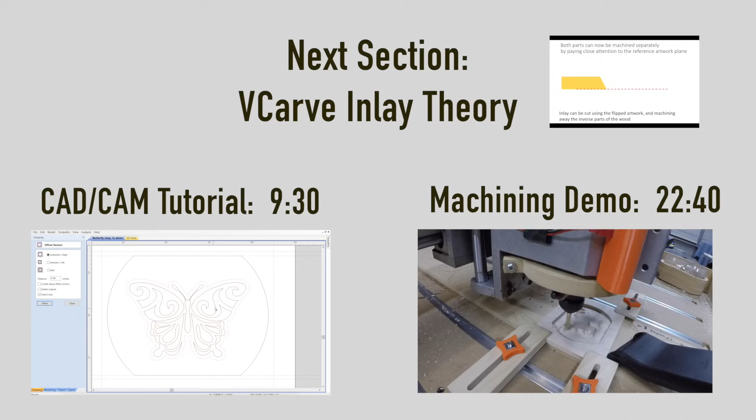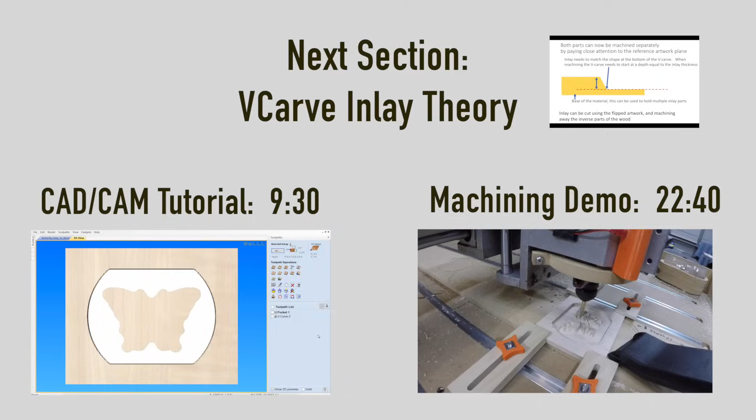If you would like to skip the next section explaining the background on how V-Carve inlays work, jump to the 9 minutes 30 seconds mark in the video to get to the CAD CAM tutorial. If you want to skip all the way to the machining section, jump to the 22 minutes 40 seconds mark.

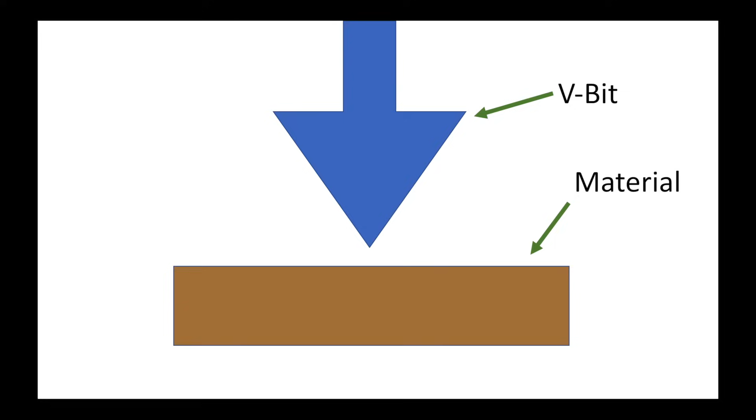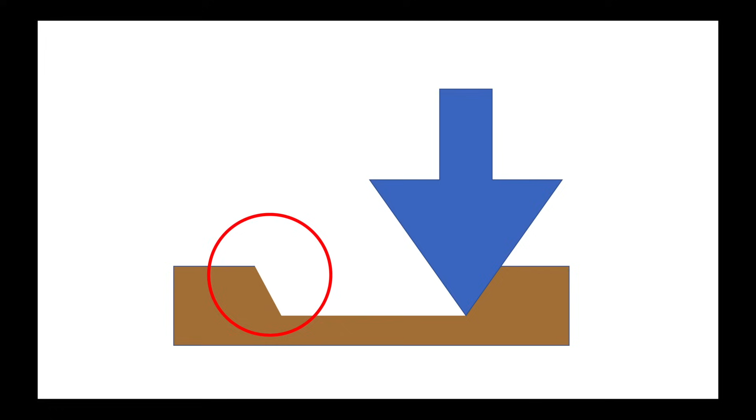First, I'm going to go through some theory of V-Carve inlays and the basics of how to machine them. So in this diagram, the blue arrow represents the V-bit and the brown rectangle represents the material we're going to cut in. And this is generally how a V-bit cuts. And it leaves a channel with angled edges. So we're going to look at one of those edges a little more closely.

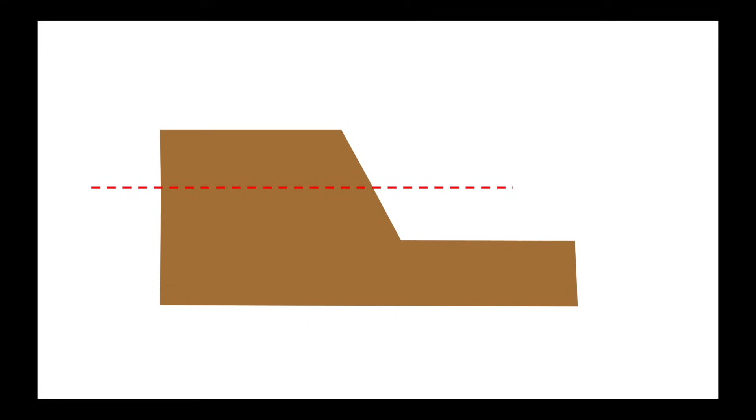And if we split this horizontally down the middle, so we split the depth of the channel, so here's a line representing that, and then we take the material that's above the line, so we color that yellow, and we rotate that around. You notice that it's a perfect fit into that channel. So this observation is the key to designing V-carved inlays.

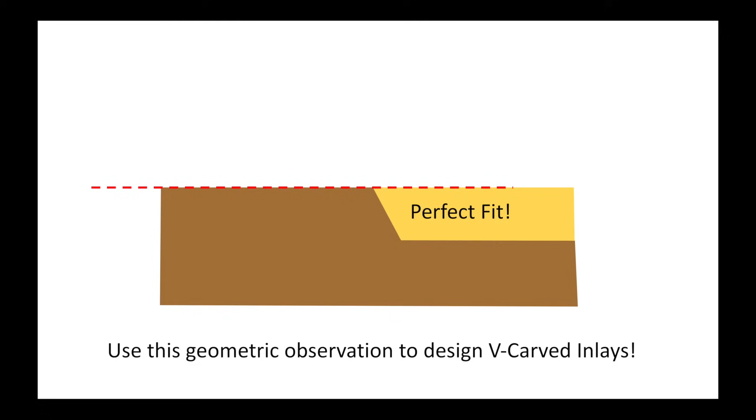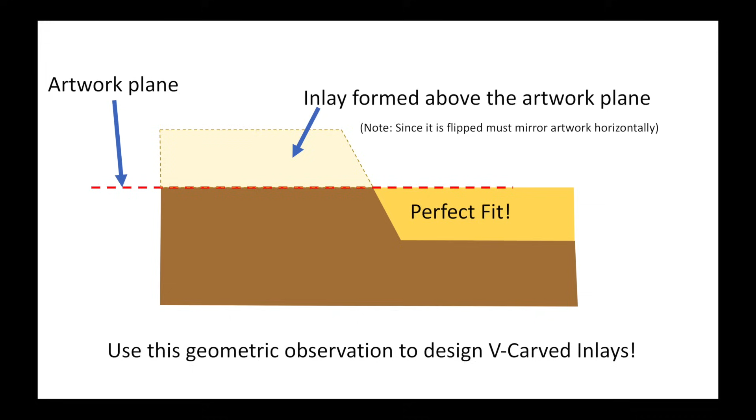Alright, so we're going to define a few terms to help us machine these. First is that line that we created is really called the artwork plane. And so this is the plane where you'd create your designs or any shapes that you want to have the inlays look like. So once that artwork plane is defined, we'll notice that the inlay, how it was machined, is really formed above the artwork. And note, since we had to flip it over to fit inside the channel, we've got to remember to mirror the artwork horizontally when we're working on the CAD and CAM. Also, the base pocket is formed below the artwork plane.

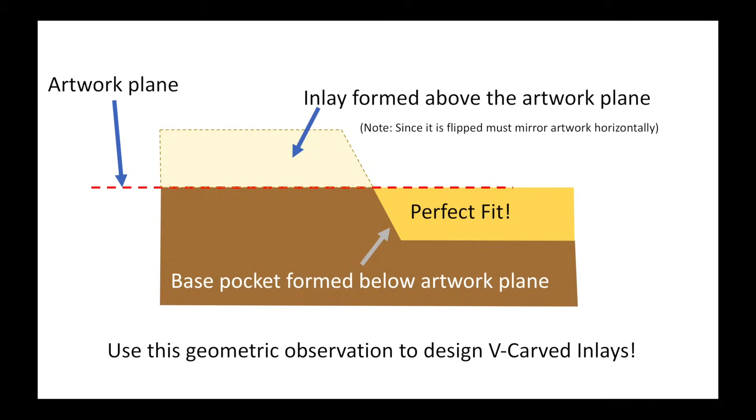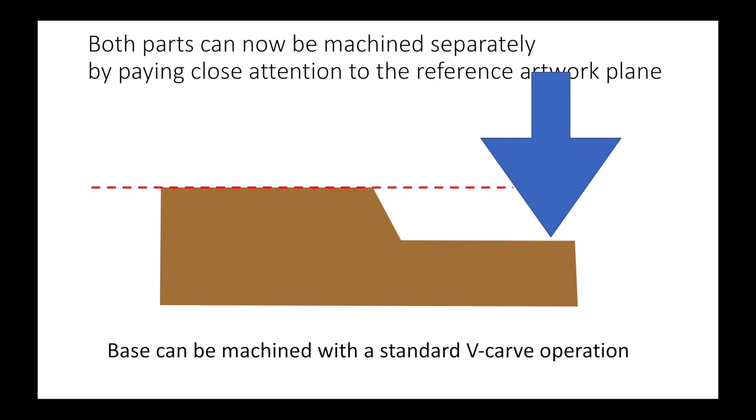So now that we've looked at that, we can see that both parts can be machined separately. And so you just have to pay close attention to that artwork plane when you're setting up the machining process. Okay, so looking at the base, this can be machined with a usual standard V-Carve operation. And looking at the inlay itself, this can be cut by first flipping it over. And so this is why we have to invert the artwork. And now we want to machine kind of the inverse parts of the wood. So we want to leave proud the parts that we're pocketing out of the base.

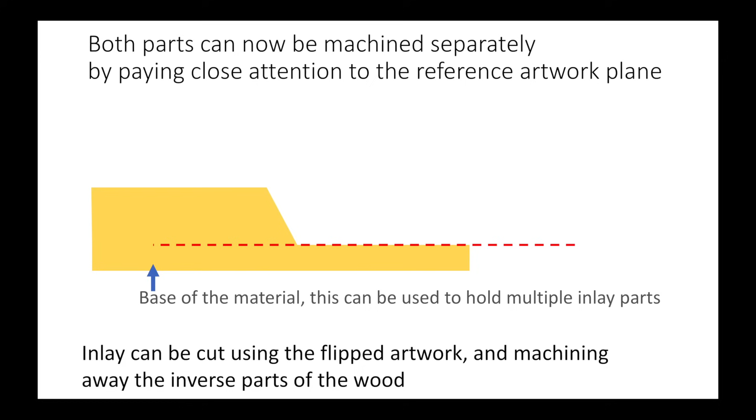So when we're doing this, we also don't want to cut all the way through the material. And so by leaving this kind of base at the bottom of the inlay, this allows us to have multiple parts to the inlay all attached together, and so we can glue them in all at one time. And another thing to note is that the inlay needs to match the shape of the artwork we have at the bottom of the V-Carve and not at the top. So this means when we're machining the V-Carve, we need to do a start at the depth equal to the inlay thickness.

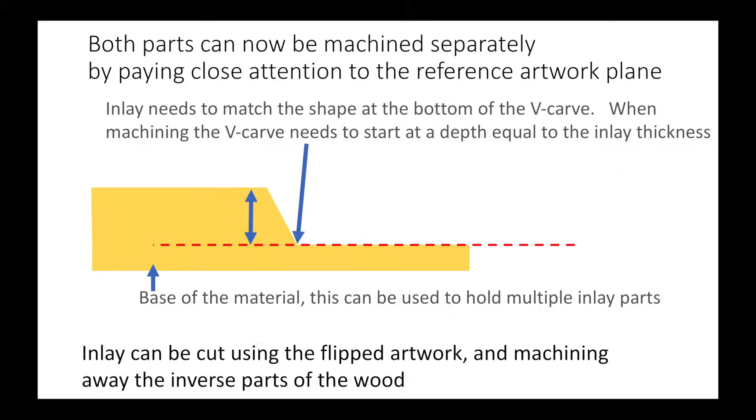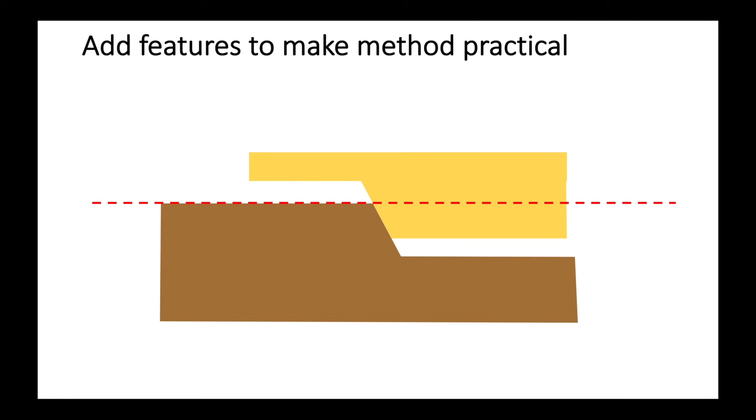So there are also a couple of things we need to do to make this method more practical. Because if we machined it as is, as we've talked about, there could be errors in the depth or the widths of sizes, and then the inlay won't turn out as well. So a few things to add to make it more practical. The first one is usually called the glue gap, and this is at the bottom of the inlay. This also doubles as a gap to allow for depth of machining errors, as well as when you're inserting the inlay, sometimes you don't get it in there at a perfect angle, and so this channel allows you to have slight misalignments, and the inlay still looks great at the end. And to accomplish that extra gap, all we do is add a little depth to the base pocket when we're cutting the inlay.

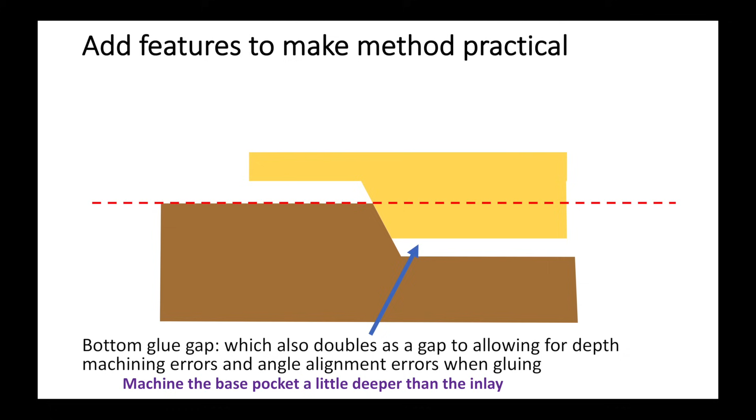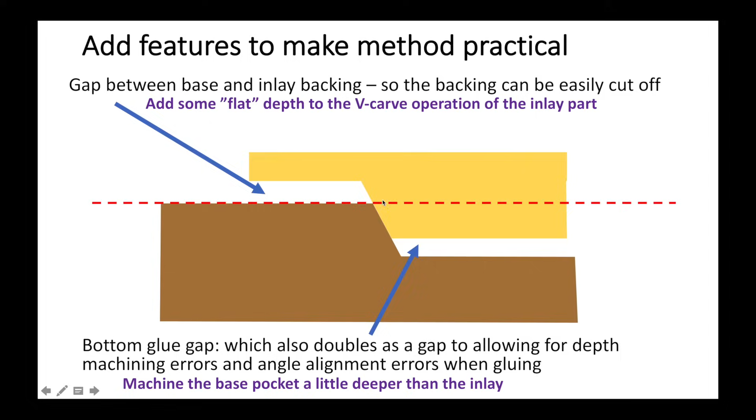And another important thing to add is a gap between the base and the inlay backing. And this is because after the glue is dried for the inlay, I usually take a bandsaw and insert it into this gap, and it allows me to cut off most of the inlay waste material. And this can be done by adding what's called flat depth to the V-Carve operation, essentially just a little extra depth beyond where the artwork plane is. And I'll go through that in a little bit more depth in a bit. Okay, so let's go over some of the basics of how we're going to machine these. So first the base.

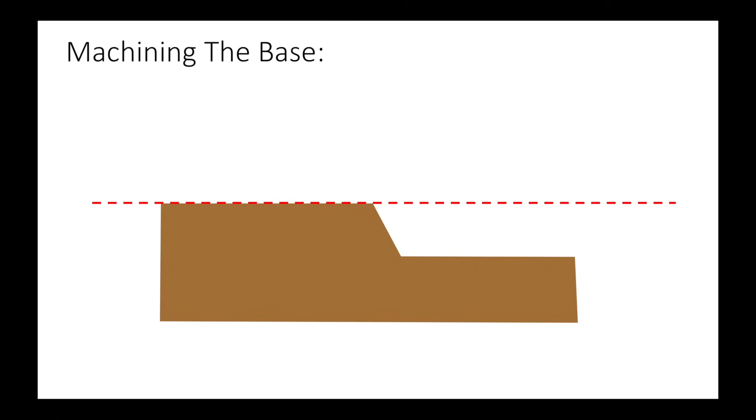So here's the base, and this is what the dialog looks like in either V-Carve or Aspire. The main components are essentially the cutting depths. There's a start depth and a flat depth option. For the base, the start depth is really the depth to which we want the artwork plane to be in the material.

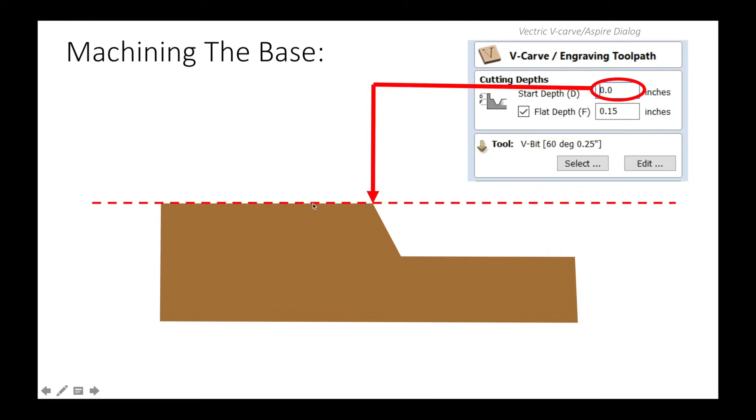And in the base, that's 0, because it's at the top of the surface. The flat depth is the depth we want the V-Carve to cut to, and in this case it's really the inlay depth plus the glue gap. For the example in this video, the inlay depth is 1/10 of an inch, and the glue gap is about 50 thousandths. So the total flat depth is 0.15 inches.

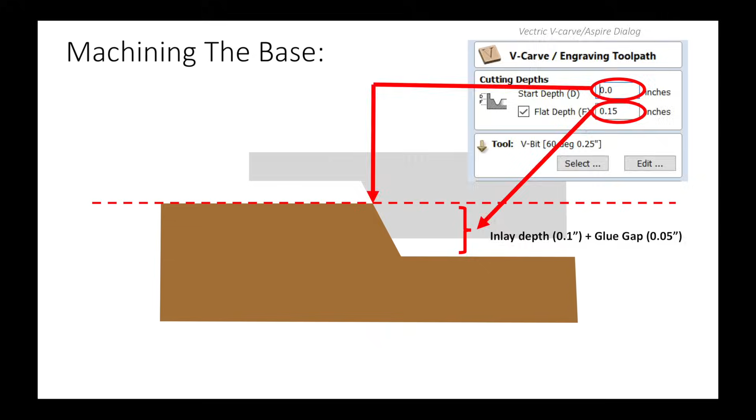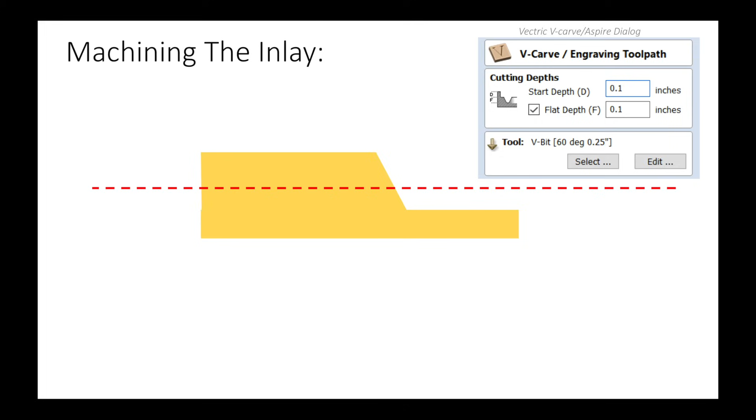Alright, so we'll look at the inlay part now. We're going to machine this flipped over, and we'll bring up the dialogue. This is the dialogue again from V-Carve or Aspire. Again, now we've got to set the start depth and the flat depth, and this is really the key to doing V-Carve inlays. The start depth is the depth at which we want the artwork plane to be located, and that is the inlay depth. For this case, it's 0.1 inches.

And then we want to add a little gap to be able to cut off the backing from the inlay, and that is the flat depth, which in this case is another 0.1 inches. Note that I'm using the exact same tool between the base and the inlay, which is a 60-degree V-Carve bit.

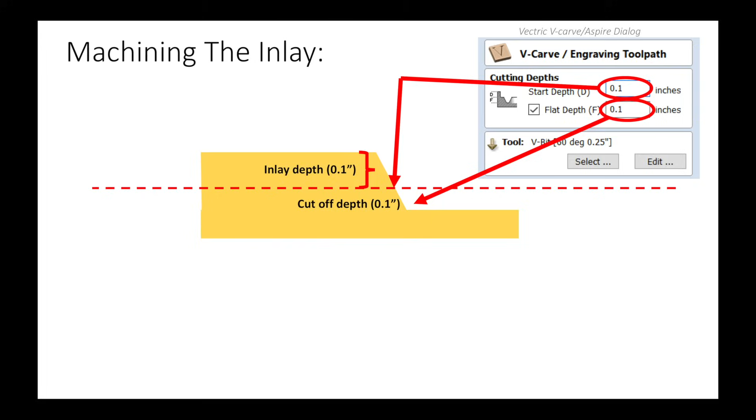One other thing to note, you should be careful that each V-bit can cut to different depths, so you want to make sure your inlay depths and gaps are all within your bit's capability. For example, in the base, there are two components, the start depth and the flat depth, equal to the inlay depth plus the glue gap. Added together, in this case, that's 0.15 inches, so we just have to make sure the V-bit can cut at least 0.15 inches deep.

Similarly for the inlay, we have the inlay depth as the start depth, and the flat depth is the gap for cutting off the waste material, so we add those together and get a total depth of 0.2 inches. In this case I'm using just a 1/4 inch V-bit, and it has a cut depth of a little over 0.2 inches, so it'll work well for this example. But for deeper inlays, you're going to need a larger V-bit.

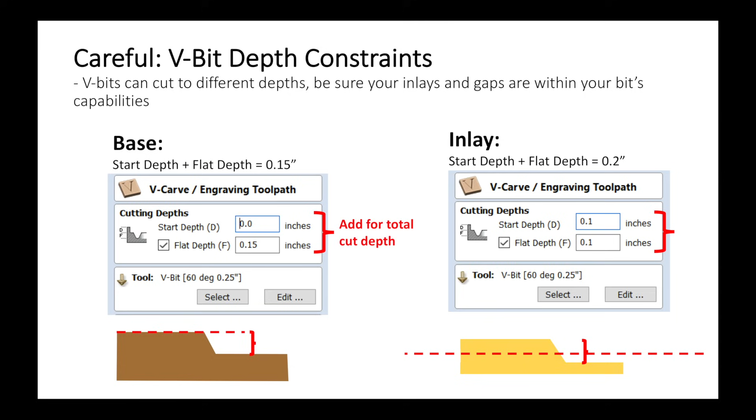So first up, set the width of the material to 5 inches and the height to 4 inches, with a thickness of about 1/4 inch, or whatever your material is. Then I usually put the 0 point in the lower left corner, and then hit OK.

After that, we're going to create the outer profile for the coaster, centered in the material, with a diameter of 3.7 inches. Then I'm going to create a little chamfer around this profile by creating 2 more circles, slightly larger, at 3.74 and then 3.66. If I just do a V-carve between these 2 lines, it'll give a small chamfer around the outside of the coaster.

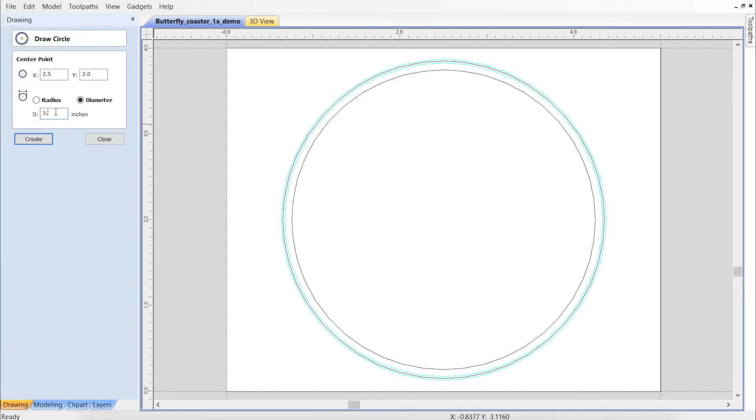Next I'm going to create a decorative groove around the outside by creating another circle at the same center, first at 3.5 inches, and then another at 3.4 inches. I'll select those and move them to a new layer, and call that Deco, for decoration. Maybe change the color so you can see it.

Next I'm going to create a guide for where to place the artwork, or the butterfly. So I'm going to create one more circle for that, with a diameter of 3 inches.

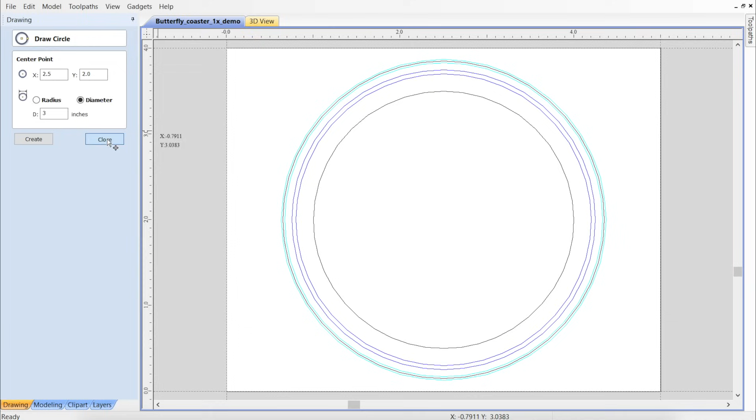All right, so the next step is to import the artwork. I'm going to import it as a vector, and there's the butterfly.

You'll notice that while it is centered in the workpiece, it doesn't look quite centered because of the larger wings at the top. So I'm just going to shift that down a little bit by selecting it all and using the arrow keys to visually center it more in the coaster. Looks about right, touching the guide circle there.

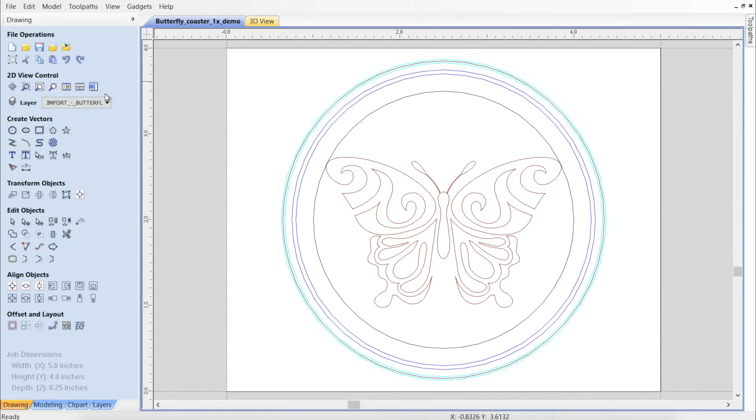All right, so now this is the design of the coaster itself, and we're going to generate the toolpaths for it. We're going to make 2 different toolpaths: some V-carving for the chamfer, the groove, and the design itself, and then we're going to cut out the profile. So the first thing is the V-carve, so we're going to select the vectors for that, selecting each one by holding down Shift.

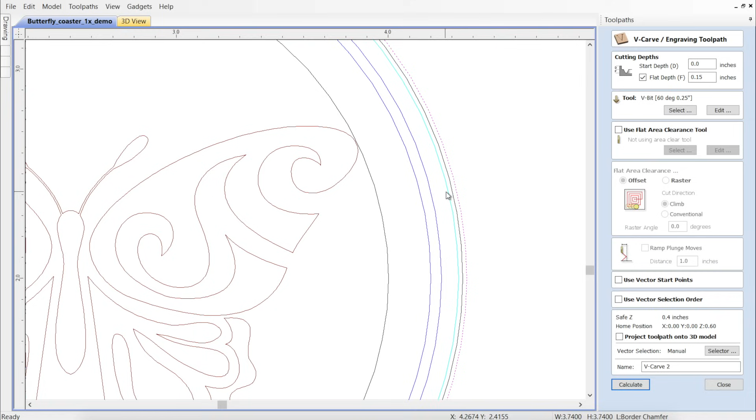The important things here are to make sure the start depth is 0, and then your flat depth, set it to the thickness that you want the inlay to be, plus a little extra space for the glue. So in this case, the inlay thickness is going to be 0.1 and the glue space is going to be 0.05. So those add up to 0.15 inches.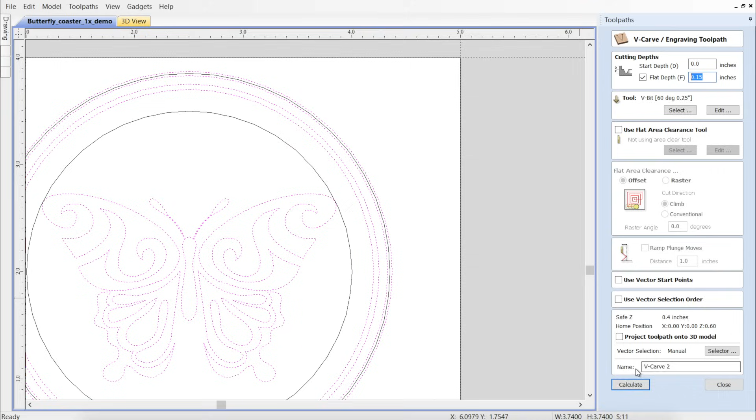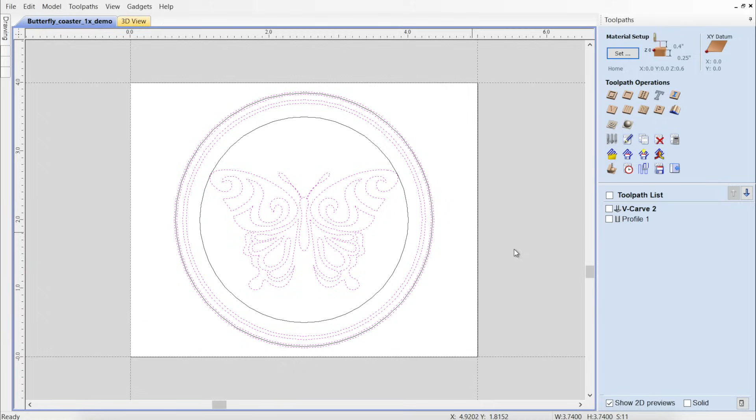All right, then calculate that. And then we can preview that toolpath. All right, that looks pretty good. So we'll close that down. And next, we're going to look at the profile. So we're going to set up the profile.

For this one, we're going to do a start depth of 0. A cut depth, we're going to go all the way through the material, plus about 25 thousandths, just to make sure we get all the way through. And then I have selected an 1/8 inch end mill here. And this is going to take 5 passes. I'm usually pretty conservative on how many passes I use. And then we'll also add some tabs.

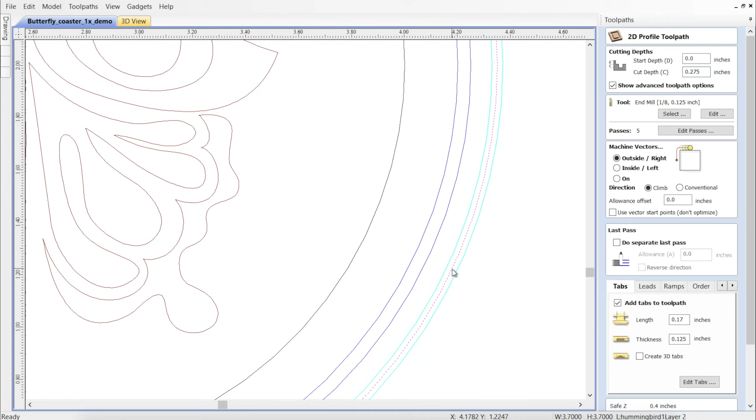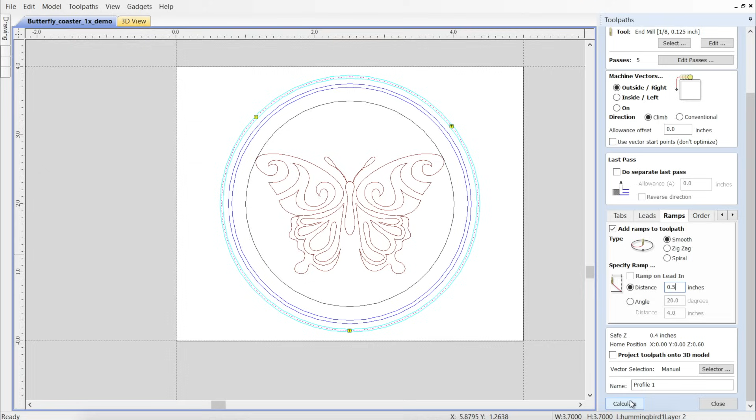So first we've got to select the profile. I'm going to edit the tabs. So I usually put in about 3 tabs on a coaster. And I usually add a ramp of about a 1/2 inch. And hit calculate. And it just gives you a warning that it's going to cut all the way through, so we hit OK.

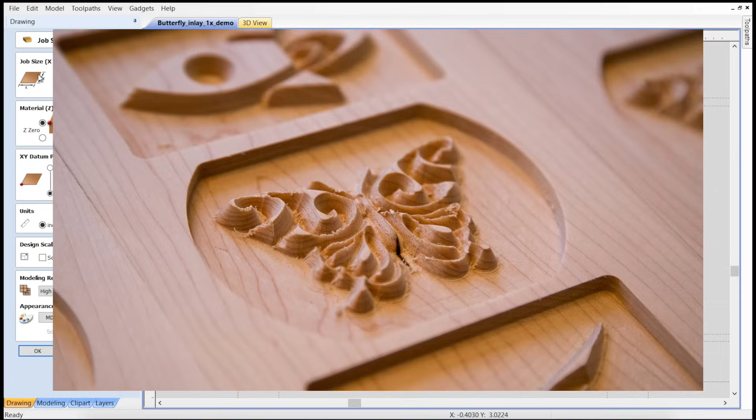Now we can preview that toolpath. And that looks pretty good. So the base of the coaster is ready to go. Okay, now we're going to make the inlay part that goes into the coaster. We're going to make this out of maple. And the width of the material is going to be 5 inches, height of 4, and a thickness of 1/4 inch.

First thing is to bring in the artwork. Once the butterfly's in, because we're going to insert this, flip it over, when we insert it into the coaster, we have to mirror it horizontally. So this is almost already symmetrical, but I'm going to click the flip horizontal button. It does flip it.

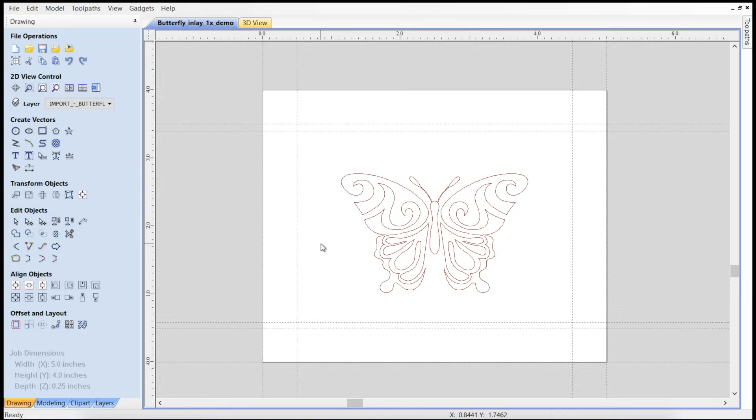Alright, now I'm going to create the zone around the butterfly that I want to clear out. And I pick a fairly big one because I use a bandsaw to cut this inlay part out before I insert it into the coaster. So the region is going to be about 3 3/4 inches in diameter.

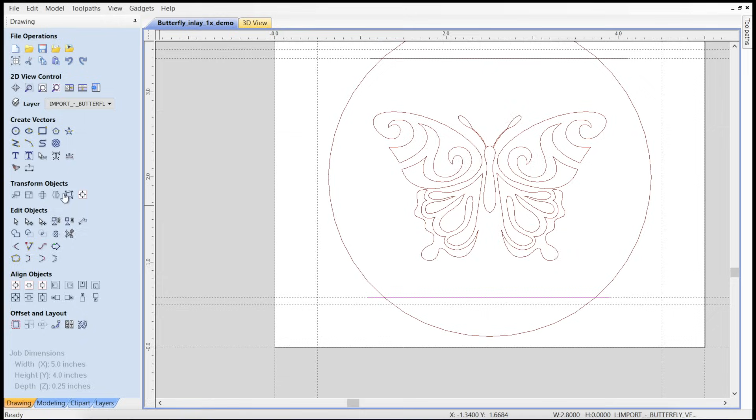That's a bit big, so what I'm going to do is cut down the top and the bottom parts of the circle. Just a little bit. And I'm just going to quickly trim off those extra regions. Okay.

Now, you can just V-Carve this if you would like, but I don't like to V-Carve it directly. I like to be able to control how deep each pass goes with the clearing tool, especially if you want to do this with really hard woods. I find that if you go too deep on the clearing cuts, I can break bits or other things. So I make my own kind of regions.

So to do that, I just select the artwork and then I use this little offset tool. And the first offset is 0.08 inches. So this gets it outside of kind of where the V bit will cut. So I offset that. And I just have to delete some of these little extra parts that show up. I'm looking for the outside line. Then I select the outside line and I offset that again by about 1/10 inch.

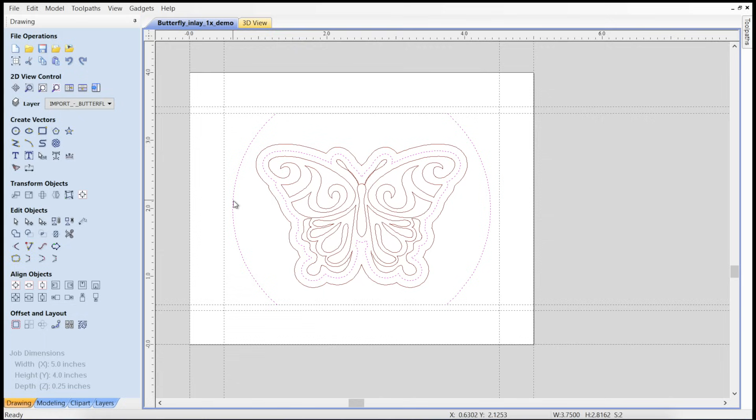Okay, so what this line out here and this line out here represent is what I'm going to use to clear with the larger end mill. So I'm going to move these to a different layer. I just call these the clearing vectors. And then this right here is going to be the outside of where I'm going to V-Carve. So I just move that to the V-Carve boundary, just to make it a little easier to see.

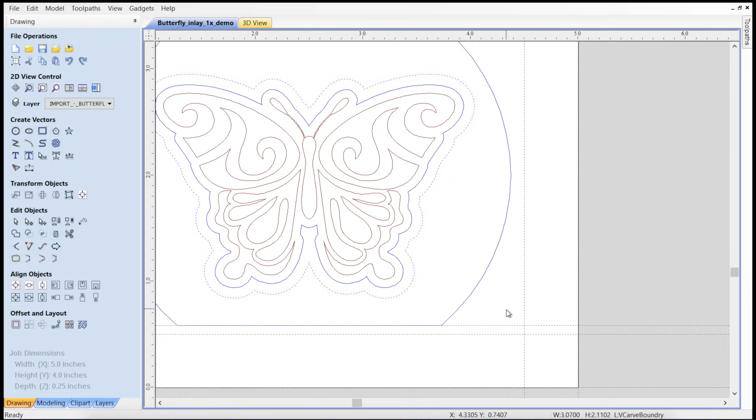Alright, so that's all we need for the CAD, and now it is time to create the toolpaths. So the first thing we've got to do is the clearing pass, and we're going to do that between these two blue lines. So we're going to do that with a pocket. Pocket out between this blue line

and that one. And we're going to go down to a depth of cut, which is 0.2 inches, and this is going to be the total that we also want to do the V-Carve. So this comes from the fact that we're doing a 0.1 inch inlay, and then we want 0.1 inch sticking out from the inlay to give us a gap to cut with the bandsaw. So this is cutting off the backing of the inlay parts.

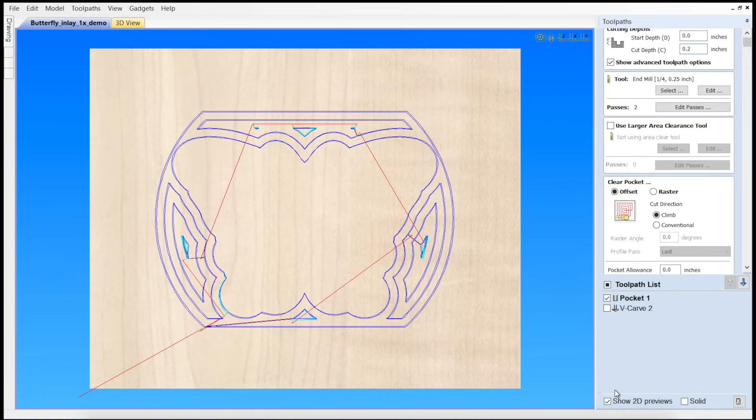And I'm going to use a 1/4 inch end mill, so we'll take 2 passes. So if you're just doing this with a regular V cut and using a clearance, you wouldn't get these two passes because your start depth is going to be 0.1, and so it only thinks it's cutting 0.1. So this is why I prefer this method. Alright, so calculate that. And we'll preview that cut.

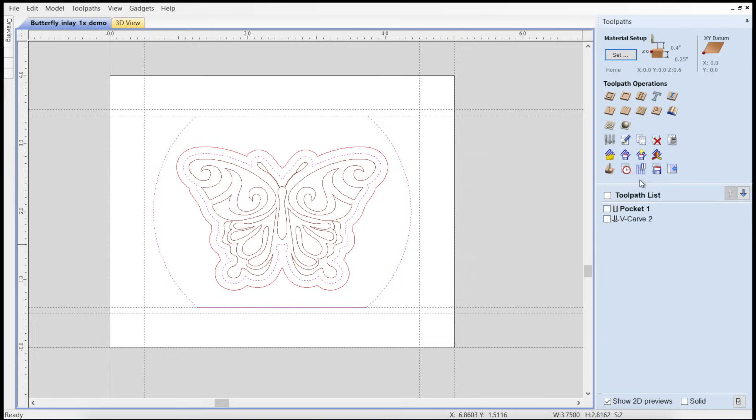Okay, so now we're going to do the next cut, which is the V-Carve. So this would be a V-Carve. And what we're going to select here is this outer boundary as well as the original artwork, which you can do by just clicking on the layer that... I just shift clicked the layer and then the outer boundary.

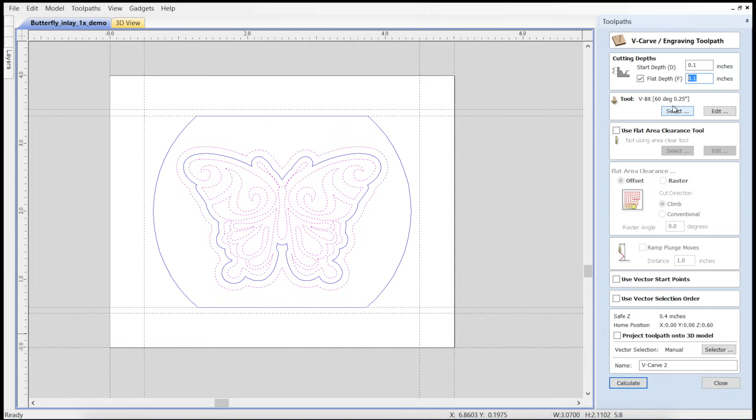And here, this is the important part of setting up the inlay: the depth start is the thickness of the inlay. So that's 0.1, and the flat depth is how much it's going to stick out in the end. So that's 0.1. And I'm going to use a 60-degree V-bit, same as on the coaster. Calculate that. And then we can preview this V-Carve.

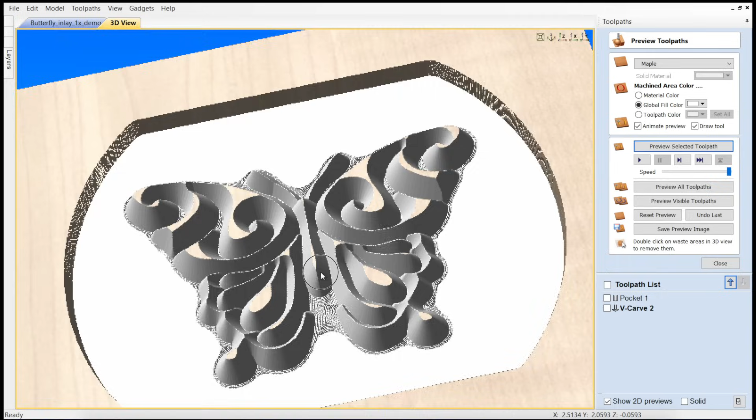And there we have it. You can look around the edges, and it should have cleared away all the extra material. That's why we moved that boundary out just a little bit. And it looks good. So now we can just select these toolpaths and save it out for machining.

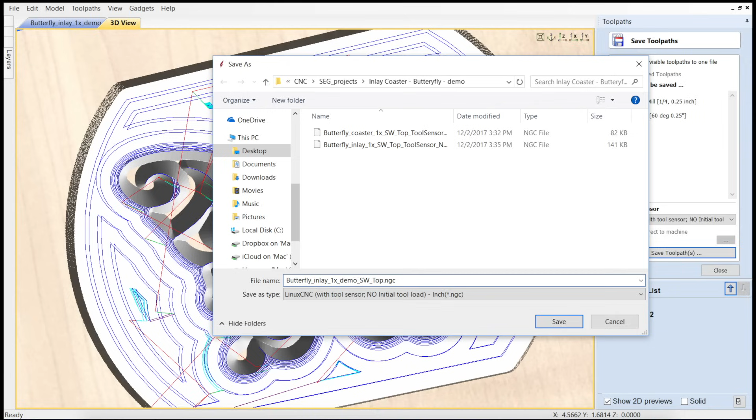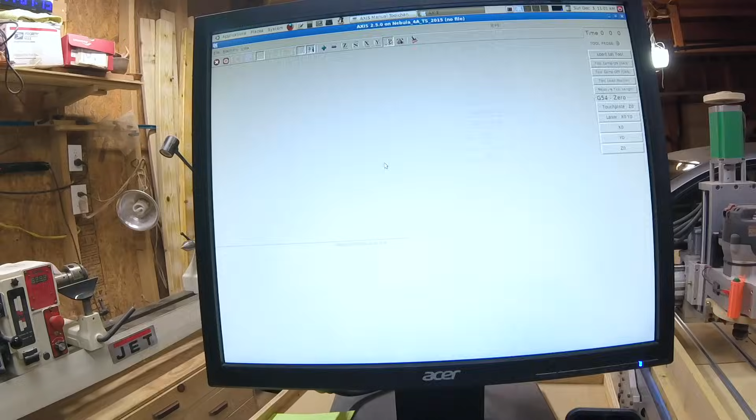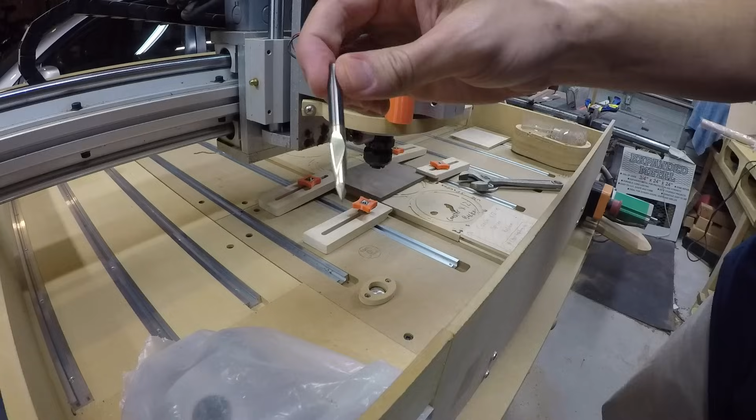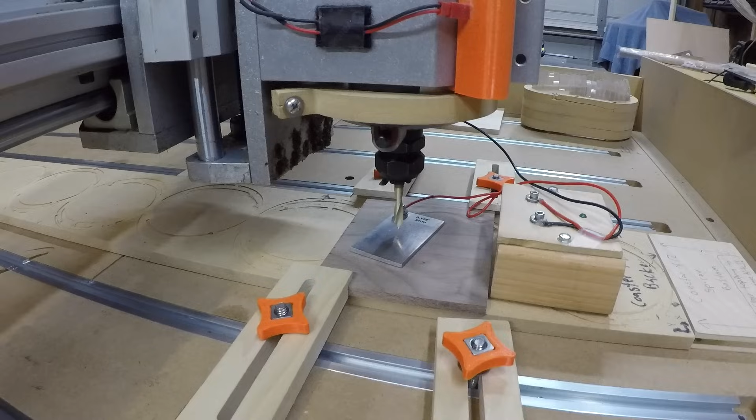I'm going to cut the base first by clamping it on the bed of the machine, homing all the axes, and then setting up the Z and then X, Y 0 points. Here's the 1/4 inch 60-degree V-bit. I use a homemade laser guide to help quickly set the X and Y 0 points. And now we're ready to start the machining.

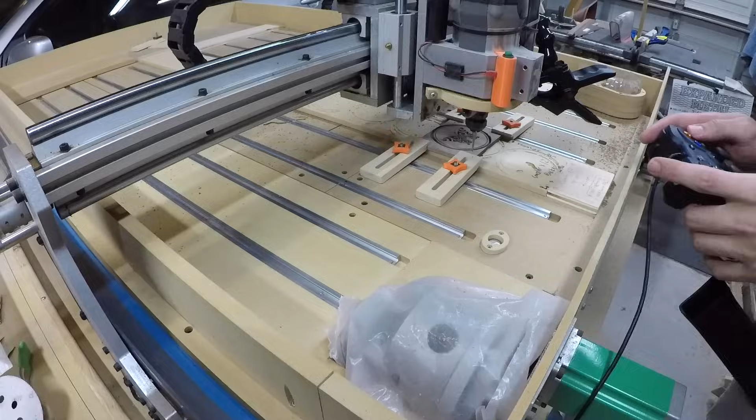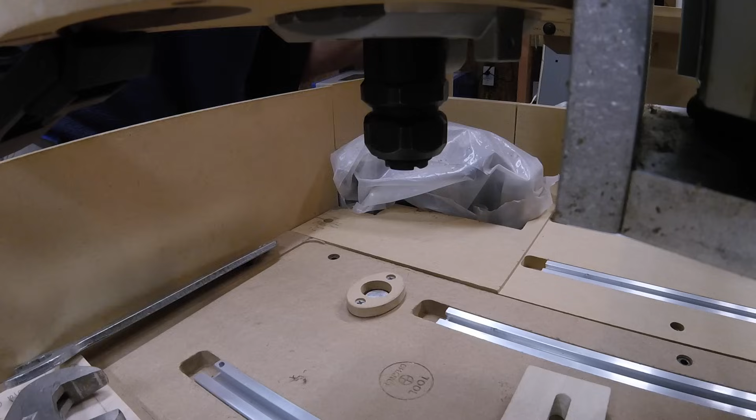Here I'm switching to a 1/8 inch end mill to route out the profile of the coaster, and then re-measuring the tool length. Next, I'll make the inlay. For the clear out pass, the first bit used is a 1/4 inch end mill. Since this is a new piece of wood, I re-zero all the axes.

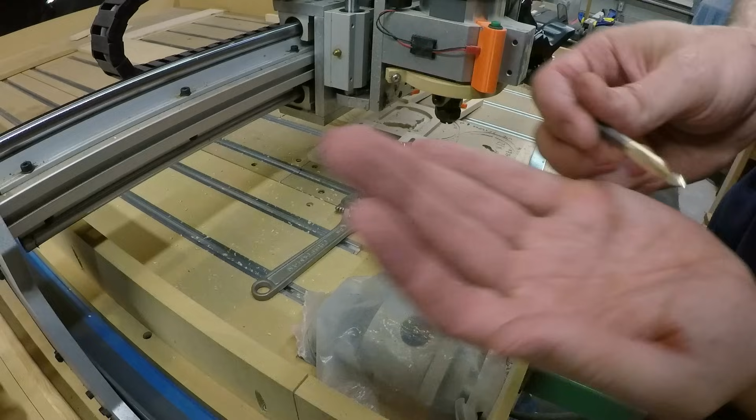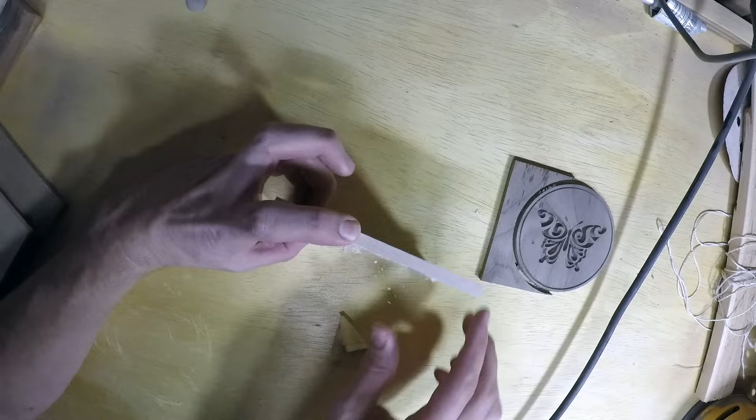I switched back to the same 1/4 inch V-bit to finish all of the inlay edges. Next, I hand sand the parts to remove any excess chips. Using the bandsaw, I cut out around the inlay. The two parts should fit together snugly without any gaps.

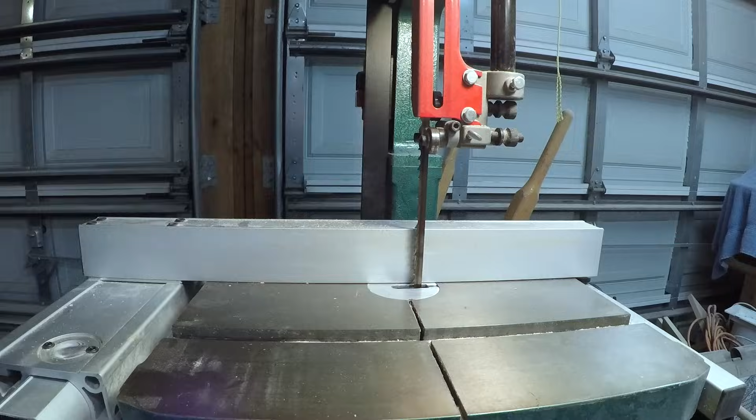Then I use a paintbrush to spread the glue into the base. I use Titebond 2 wood glue. I don't like to use Titebond 3 because it dries to a much darker color. Back to the bandsaw to cut off the inlay backing. This step is much easier if you leave the coaster in the original workpiece and don't cut off the tabs first.

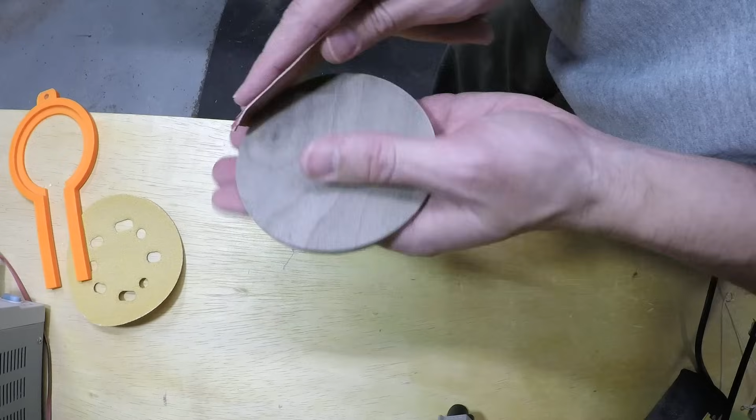Here I am sanding the edges and removing the remainder of the tabs. Next, I use a belt sander to remove the bulk of the remaining inlay backing and excess glue. I 3D printed a jig to help me hold the coasters, as I had sanded my finger a few too many times. I finish by hand sanding with 320 grit paper.

And sign, date, and note the wood species on the back with a wood burner. The vacuum cleaner removes any remaining dust. Then I finish the coasters with polyurethane. I give the coasters 2 coats of clear gloss, followed by a coat of satin on each side. After the coaster is dry, I finish it by adding a 3-inch cork disc to the bottom side.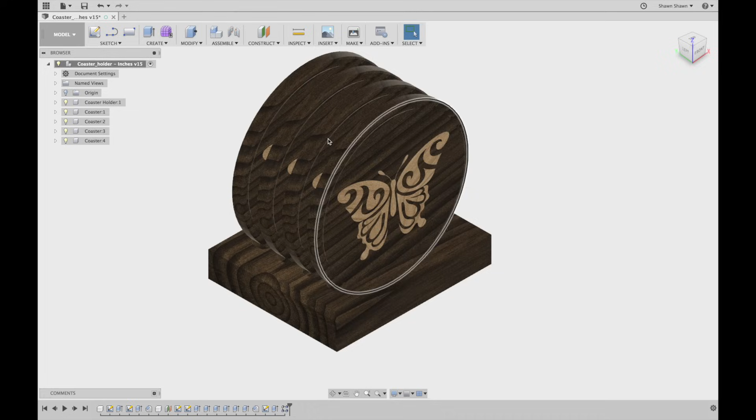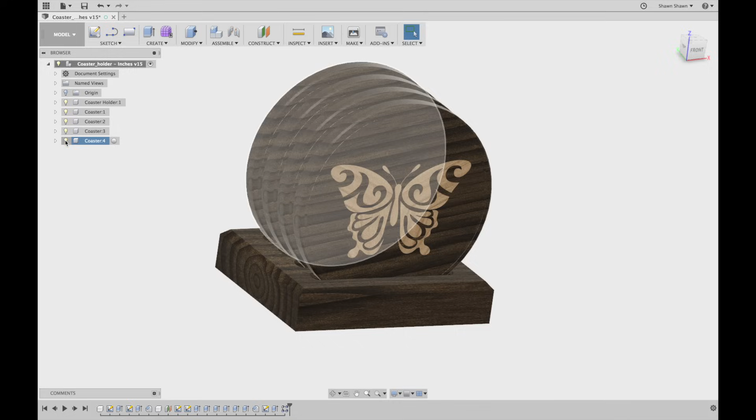Now I'm going to make a coaster holder. This coaster holder is meant to hold 4 coasters and is simply a rectangular block with a chamfered edge and slots to hold the coasters. And this is what it looks like roughly when it'll be finished. So these are the coasters sitting in the holder. Alright, I'll turn off the coasters now. Alright, here's what the coaster holder looks like with no coasters in it.

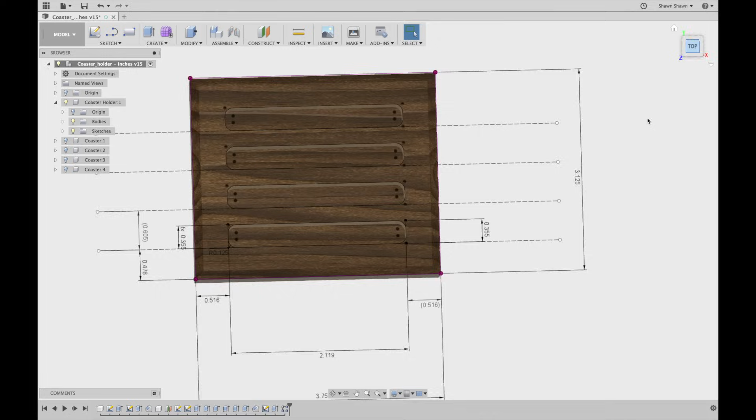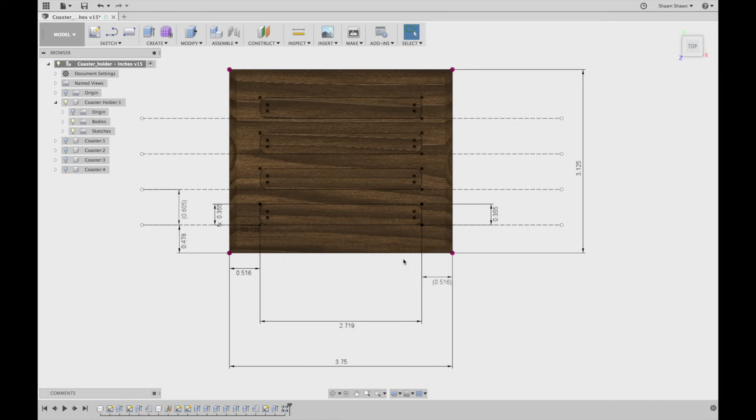And I'll show you the most important dimensions. Alright, it's about 3 3/4 inches long and about 3 1/8 inches tall. The slots are 2.719 inches by 0.355, and these dimensions I got by just trial and error by trying out different depths and widths. And the other dimension that's important is the depth of cut of these slots, and so that depth is 0.55 inches. So that is the design of the coaster holder.

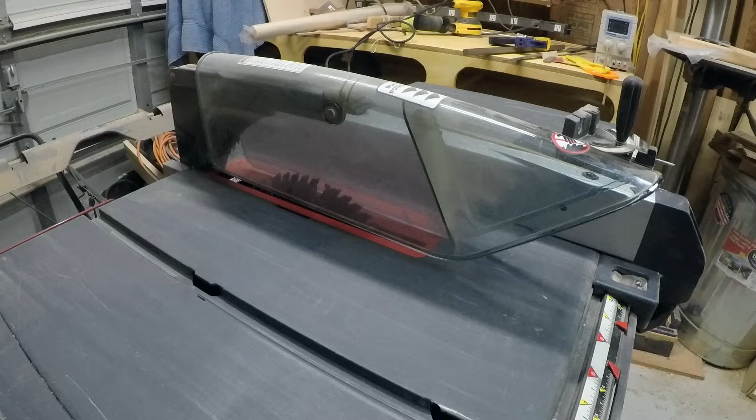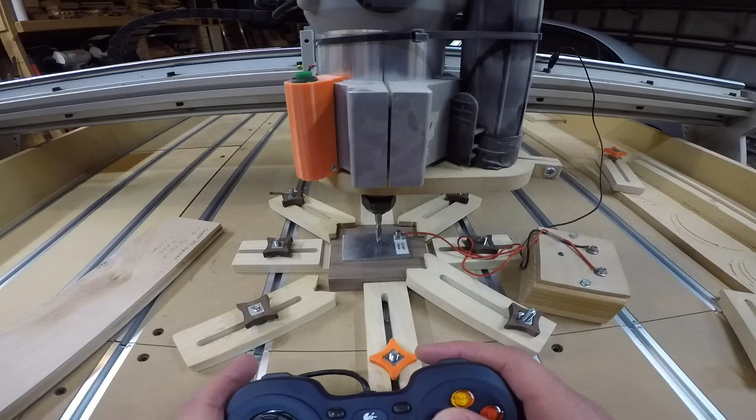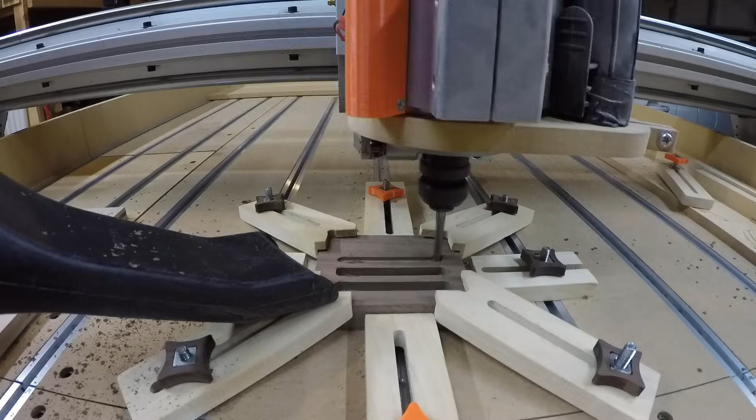I use a jig or previously made coaster holder to help me quickly set up the saws to cut the 3/4 inch material to size. Then I use the same basic steps to route out the slots in the coaster holder. After rough sanding, I hand route a chamfer around the top edge. I finish up by hand sanding, signing the back, and then applying the same coats of polyurethane.